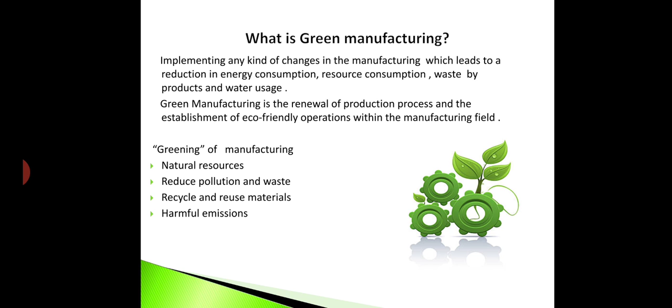What is green manufacturing? It is implementing any kind of changes in manufacturing which leads to reduction in energy consumption, resource consumption, waste by-products, and water usage. Green manufacturing is the renewal of production processes and the establishment of eco-friendly operations within the manufacturing field, including greening of manufacturing, using natural resources, reducing pollution and waste, and recycling and reusing materials and harmful emissions.

Why is green manufacturing so important? Green initiatives aim to minimize the impact of human activities on the environment. As much fresh water has been withdrawn in the last 30 years as in the last 3 centuries, with rising emissions and associated climate change, growing waste generation and pollution.

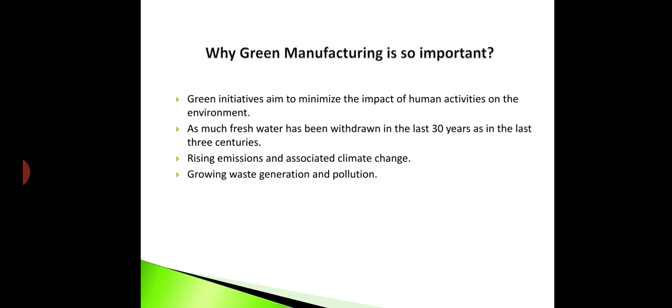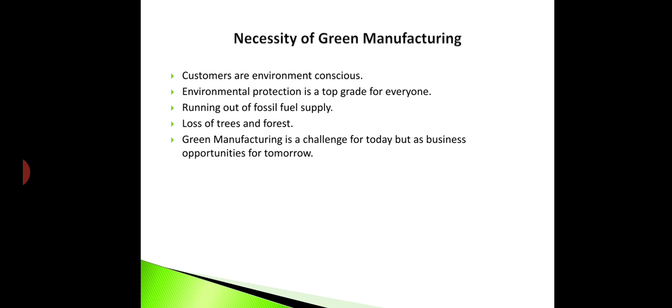Necessity of green manufacturing: customers are environment conscious, environment protection is a top grade for everyone, we are running out of fossil fuel supply, and there is loss of trees and forests. Green manufacturing is a challenge for today but has business opportunity for tomorrow.

Transformation to green manufacturing involves industrial operations in three ways: green energy, green processes, and green products.

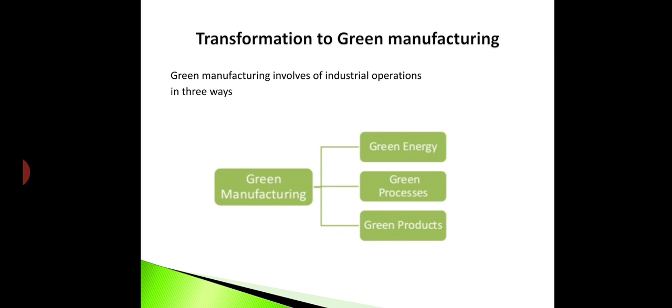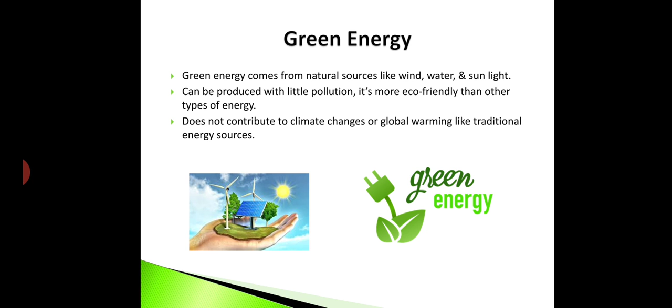Green energy comes from natural sources like wind, water and sunlight. It can be produced with little pollution and is more eco-friendly than other types of energy. It does not contribute to climate change or global warming like traditional energy sources.

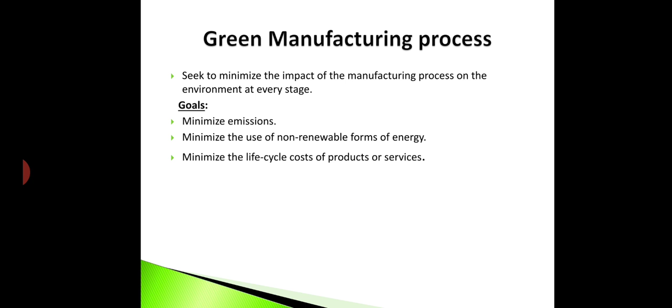The green manufacturing process seeks to minimize the impact of the manufacturing process on the environment at every stage. The goals are to minimize emissions, minimize the use of non-renewable forms of energy, and minimize the life cycle cost of products or services.

Green products: the third area is implementing green processes in operation. This entails efficient use of key resources, reducing waste generation through lean operations, bringing down the carbon footprint, and conserving water. Employing green processes improves operational efficiency and lowers costs.

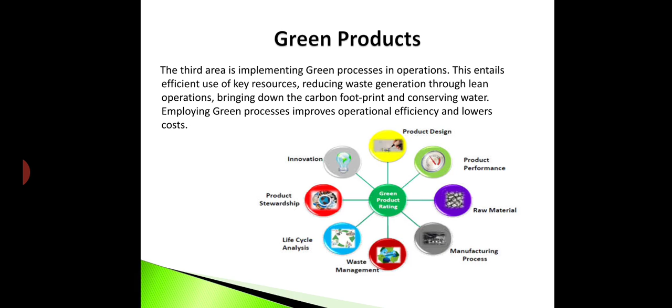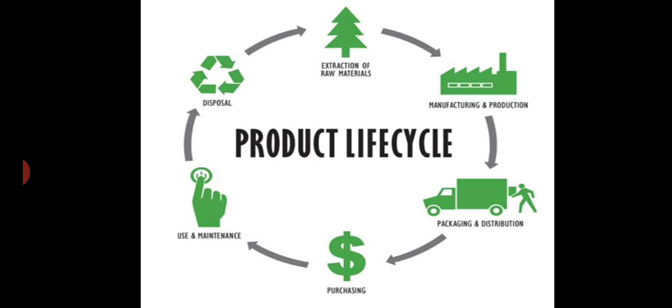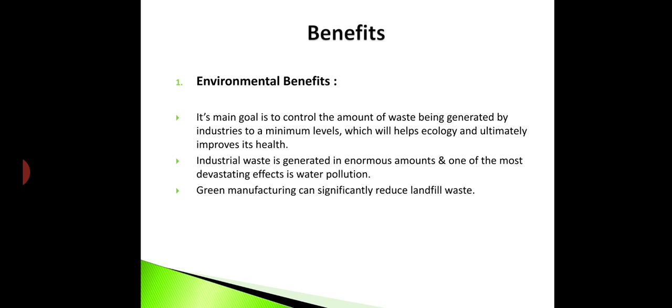Benefits: environmental benefits. Its main goal is to control the amount of waste being generated by industries to a minimum level, which will help ecology and ultimately improve its health. Industrial waste is generated in enormous amounts, and one of the most devastating effects is water pollution. Green manufacturing can significantly reduce landfill waste.

Economic benefits: industry can also benefit from reduced production costs, which typically result from upgrading production facilities to include green building technology such as solar and wind power. Adopting green manufacturing also promotes a positive image for industry. Eliminating waste saves money because companies wouldn't have to figure out what to do with parts in the end when they could be recycled.

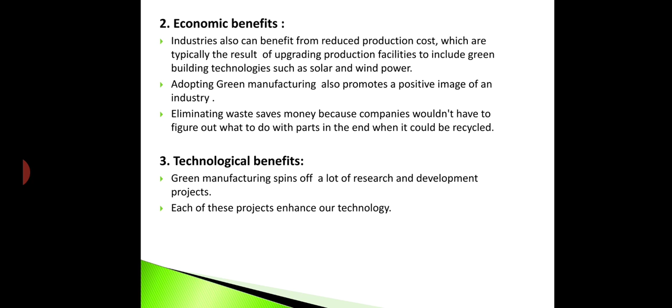Technological benefits: green manufacturing spins off a lot of research and development projects, and each of these projects enhances our technology.

Challenges: long-term effort. It requires a lot of determination from manufacturers. Green manufacturing is not just a short-term effort, as results will not show in a short period.

Investment: companies must invest large amounts of cash in water treatment and emission control, leading to an increase in production cost. With all the spending in the above mentioned fields, there will surely be an increase in production cost.

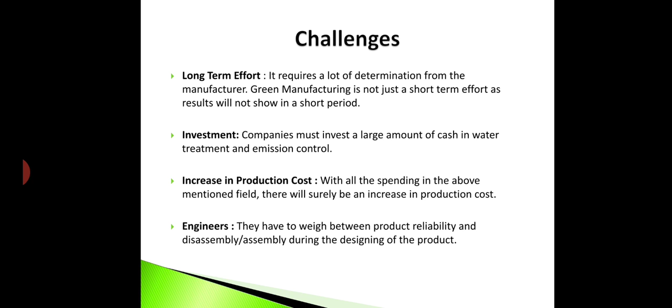Engineers have to weigh between product reliability and assembly during the designing of products.

Emerging technology in green manufacturing: the new and emerging technologies aid in both making traditional business greener as well as creating completely new ones. For example, technologies addressing greenhouse gases can be classified into 5 broader categories.

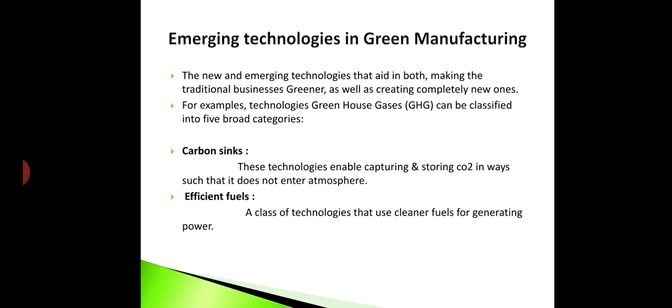Carbon sinks: this technology enables capturing and storing CO2 in ways such that it does not enter the atmosphere. Efficient fuels: a class of technology that uses cleaner fuels for generating power.

Consumer green involves using clean and efficient fuels at the user's end, with solutions covering demand side management and solar water heaters. Green transportation includes electric vehicles, fuel cells, and biodiesels.

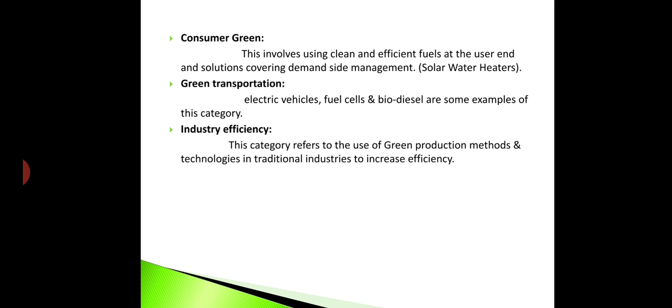Industrial efficiency refers to the use of green production methods and technology in traditional industry to increase efficiency.

Methods of carbon sinks include forests as sinks, afforestation, reforestation, and plantation. Trees are natural sequestrators of carbon. They take carbon from the atmosphere, utilize it in the process of photosynthesis, and store it in the form of biomass or wood. For this process of carbon sequestration to succeed, it is essential that the carbon must not return to the atmosphere through burning.

Restoration: wetland soil is an important natural carbon sink. Wetlands conserve 14.5% of the soil carbon found in the world, but only 6% of the world's land is composed of wetland.

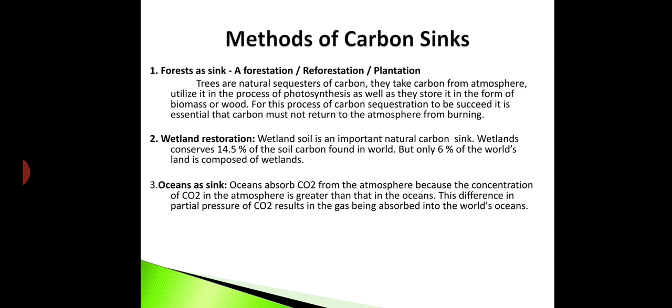Oceans as sink: oceans absorb CO2 from the atmosphere because the concentration of CO2 in the atmosphere is greater than in the ocean. The difference in partial pressure of CO2 results in the gas being absorbed into the world's oceans.

Eco-friendly fuels include compressed natural gas (CNG), biodiesel, hydrogen energy, solar cars, and ethanol.

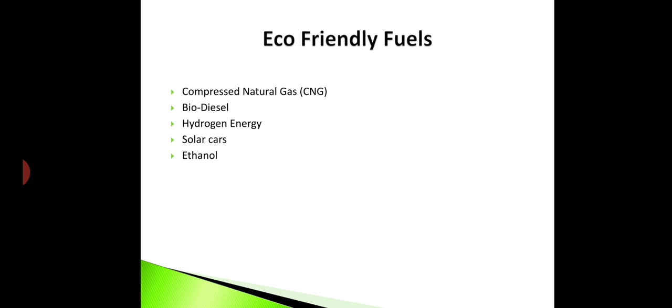Suzlon Energy is the fourth largest wind turbine company in the world, and the company has convinced the world that wind is going to be the future energy.

They have their wind power factories in Pondicherry in India, and their corporate building is regarded as the best energy efficient building in India.

Tata Metaliks Limited adopts every day as Green Day, and to achieve the greener society objective, the company does not operate on Saturdays with the objective of saving energy.

The company also follows the policy of not switching on lights during the day, with the whole office depending on sunlight during daytime.

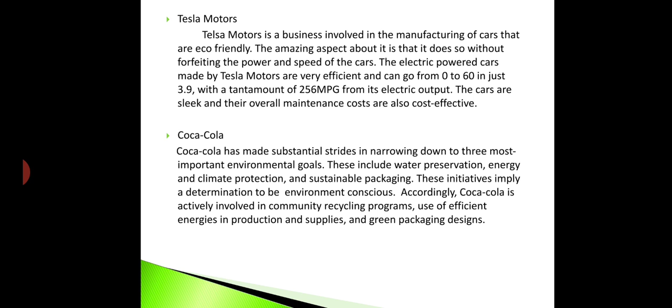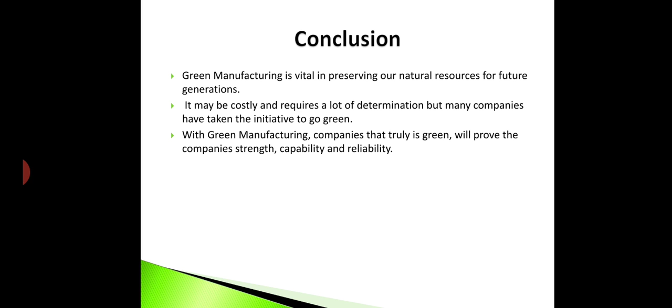Conclusion: green manufacturing is vital in preserving our natural resources for future generations. It may be costly and requires a lot of determination, but many companies have taken the initiative to go green. With green manufacturing, companies that are truly green will prove the company's strength, capability, and reliability.